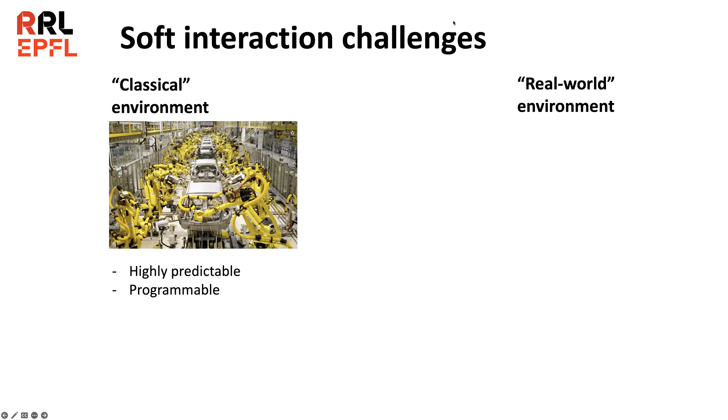To us, robots developed in classical environments are where the industrial revolution started, really. This has been the core essence of where robotics have come about in terms of their main challenges. How do we make our robots do better things than humans in a more safe, highly predictable environment? In that place, it was important that robots overperform humans in a mechanical way, so augmented performance compared to humans in terms of force, speed, and precision was very important.

Now fast forward to 2023, while augmented mechanical performance is still very important, we are living in a real world environment where things are not very predictable. Therefore it's not easy to program, it's not easy to control. In that case, how do you determine which robots are better suited? Which robots are actually an improvement from previous versions? Maybe we need a different type of metric than just augmented performance.

Maybe it can still be augmented performance, but in terms of interactivity. So having robots that are more adaptable to this random environment, robots that are more reconfigurable to unknown circumstances and unknown topology of the environment, and still being safe during operation, may be a new metric that we can employ on top of augmented performance.

This has been the question for a long time in my work. First of all, it's very difficult to create a benchmark to measure this. How do you know if your robot is more adaptable than another robot, especially when your body configuration is completely different? How do you know if your robot is safer than another option? How do you measure? How do you compare?

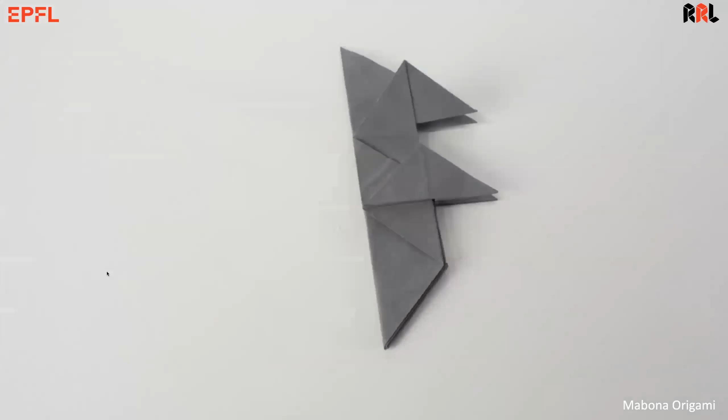We get this inspiration by having this quasi 2D substrate, manufacturing in quasi 2D, and using that to create multiples of different configurations, just like folding a piece of paper. If you fold it long enough and precisely enough, you can create something like this, a rhinoceros. If you are not as dexterous, you can at least fold up a paper airplane or a paper boat. This is multiples of pictures put together to create an animation of a rhinoceros popping up.

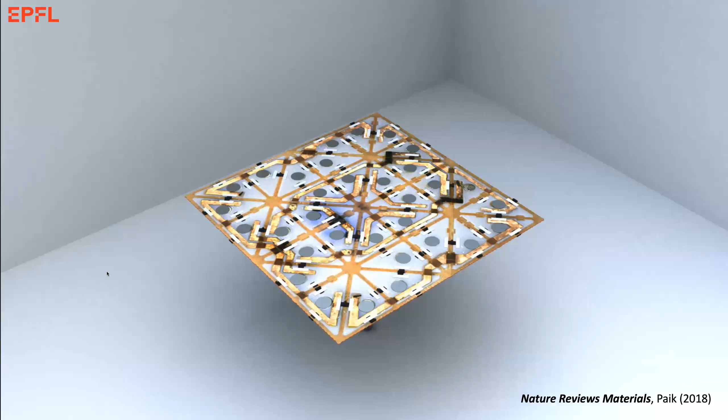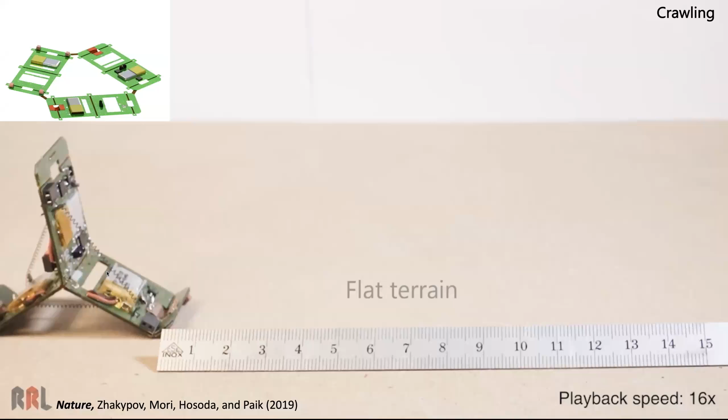One of our simplest robots is called Tribot. It's manufactured exactly through this method. What you see in the top left corner is a Tribot, a 3-surface structure that self-folds and advances forward by pushing itself, employing an inchworm locomotion motion. On flat terrain that's very smooth, you can push forward and retract the back leg, and by moving both feet, you can create different levels of friction to advance forward.

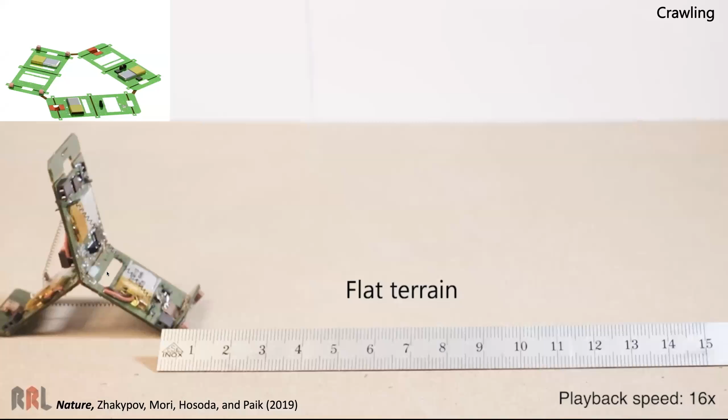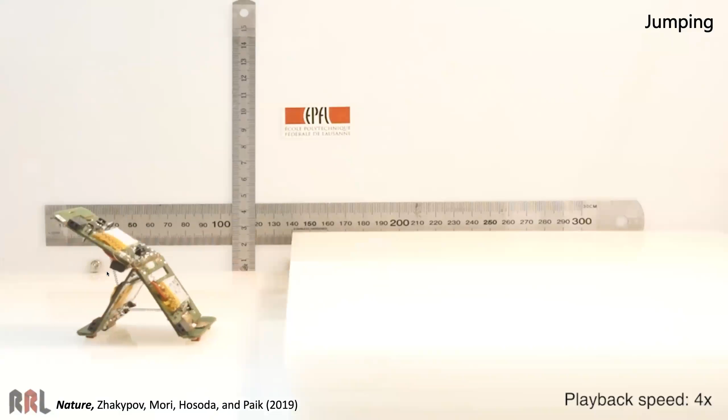But what if we give it a different environment? What if it has a higher slope and it's no longer flat and smooth? For example, rough terrain - it needs to adapt its foot shape and change its actuation sequence. With a slope of 10 degrees, it will still roll over. What if you give it a bigger challenge, like introducing an obstacle? It can actually hop over it. Very simple mechanism, very simple robot, but by changing its actuation sequence and the configuration of its foot motion, it's able to adapt to the environment.

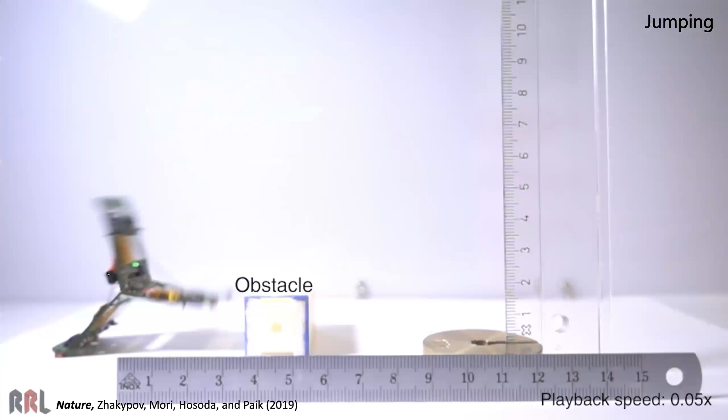That's what's quite unique about reconfigurable robots. By changing the configuration of its morphology, the foot shape, or anything else on the body, it's able to achieve different tasks, whether known from the beginning of the conception or not.

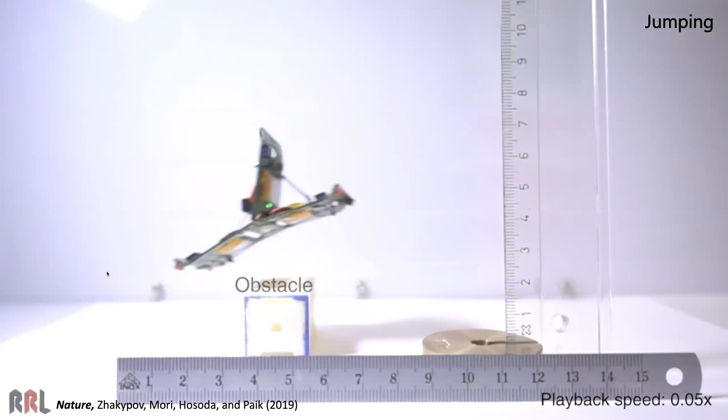What makes it more exciting is that these robots can remain simple, but you can customize all the agents, and the strength comes in numbers. The more of these robots you have, we can start playing with the morphing of a swarm of these robots. When you talk about swarm robotics, which is not exactly what my lab is focused on, we are still able to create hardware platforms that can be used to study bigger swarm groups.

Obviously, there's a group at Harvard that's done the kilobots. We have not made thousands of these robots, but this is a first-time case study of a platform that can create multiples of locomotive motions. We're creating 3 distinctive locomotions plus an additional 2, so a total of 5 different locomotive modes, depending on its environment and depending on the communication.

The current version of Tribot has transceivers and receivers to gather information from its neighboring agents. It's able to communicate, collect data, and manipulate objects alone as well as with its neighbors, hopefully achieving its goal regardless of the environment or how tough it may be from the beginning of its journey. The take-home message here is that even if your robot is small, if you have a large number of them, you can achieve a larger task field.

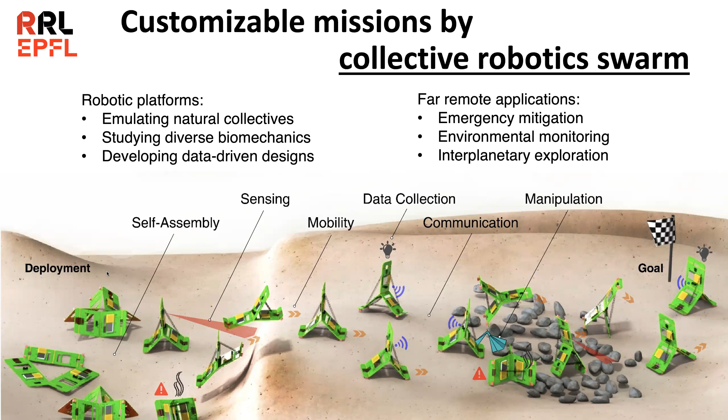How do we manufacture them to be so many? We rely on this quasi 2D manufacturing process. Normally, quasi 2D manufacturing processes don't really exist for robots, but they do exist for creating IC chips, which are a critical component in any robotic system or machinery. We rely not necessarily just on photolithography to create the PCB board, but on creating the overall shape and outline of the robot that allows us to embed different existing components and then run the final assembly.

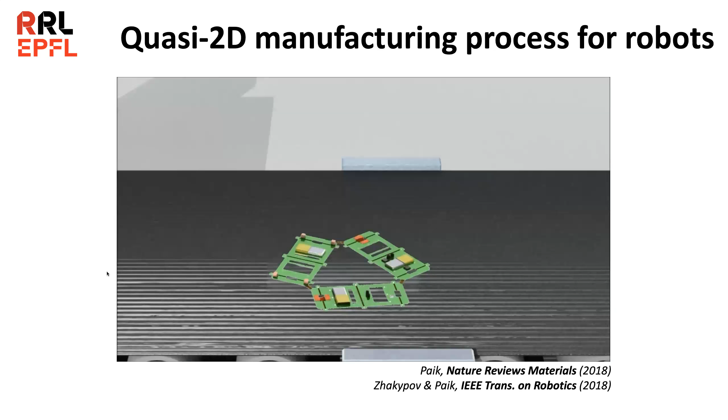But the magic is right here, the self-folding part. If you're able to create a self-folded robot into a three-dimensional robot, the magic, or the difference, in changing the dimensions allows you to create three-dimensional movement. That means three-dimensional tasks.

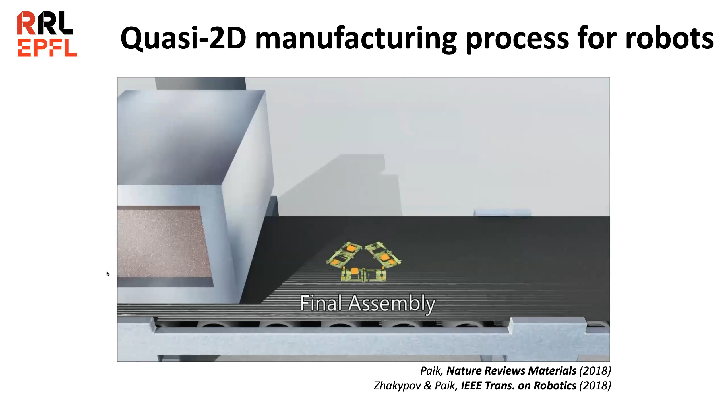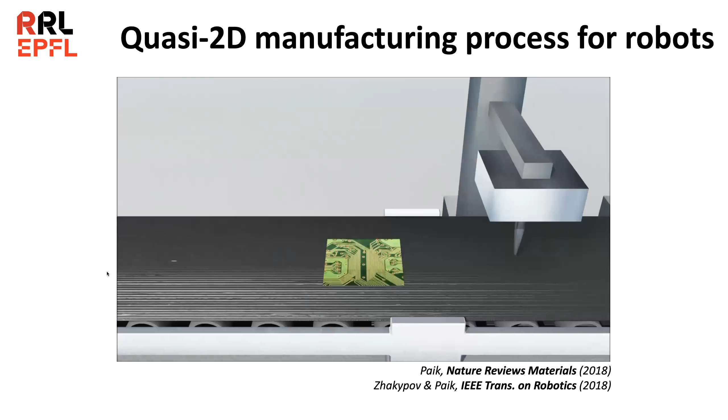Changing this dimensionality allows us to not only create such a large design space, but also such a large workspace that the robots can achieve. And that really allows me to talk about sustainability.

Sustainability is such a huge word for anyone doing anything in recent years, not just because we're talking about how to preserve the environment, but it invites us to think about how we're approaching our level of studies in a more sustainable manner.

To me, having a sustainable platform for robotic manufacturing means we produce what's necessary for the application. If the application necessitates additional sensors or different types of motors, this quasi 2D manufacturing platform allows us to have that. How?

Basically, we're following this conveyor belt of materials, cutting processes, pressing, pick and place of different components, and assembly at the final end. By having this quasi two-dimensional manufacturing platform, it allows us to insert different versions or different processes in between, as long as it's within this work field, within this dimension.

On the application side, the application will demand you to have different types of components. That can be used as a customized file to update the system design. The system design has different parameters. It's not quite completely new.

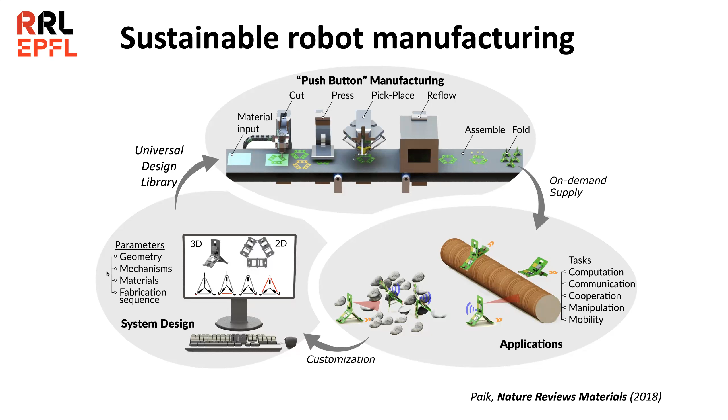Don't just take my word for it—based on this manufacturing process and methodology, we were able to update and iterate our design multiple times, beyond what I was willing to sign up for. And that's when we were working with...

Mercedes-Benz industrial designers who were requesting us to update our flap design for the concept car to be presented in 2020. That meant us having to reiterate the flap design about 50 times over the course of a couple of months. That's quite unheard of in terms of creating any hardware, let alone robotic hardware.

So what we actually ended up producing was a quasi 2D platform that creates three-dimensional motion. I'll go more into detail about what this kinematic chain is, using the bottom plate as an example here.

I don't know—can you see, let me see if I can get my cursor. Can you see it? We can see it, can you see my cursor moving? Yeah.

Perfect. So the top surface actually moves in 3 degrees of freedom, meaning it has a translational Z-direction translation, and 2 rotational degrees of freedom.

What we had to update was these flap angles and flap length, so that we could optimize this flap range of motion for the size of the motors. We also had to take into consideration whether we could optimize the height that it gets popped out of the foil.

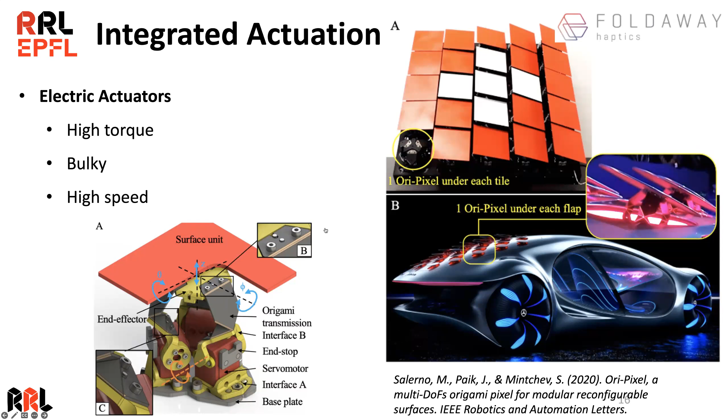So we installed 36 of these modules on the back of the Mercedes, and this is how it looked at the end of our 6 months of effort.

Hello? Hello? Yes, okay, I can hear you still. Perfect. Right. Yeah, so can you hear me, Jimmy? Yeah, can you hear me?

Okay, yeah. So what you see here is popped up foils that are moving at 3 degrees of freedom. And as you can see, they're completely embedded behind the airfoil zone of the car.

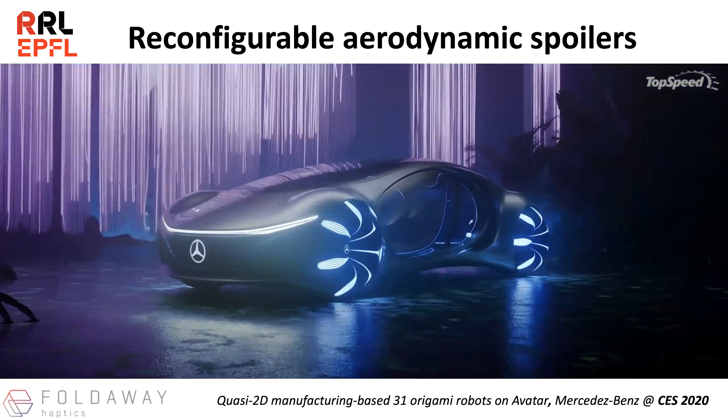That was the result of basically 60 iterations of the foil length, the panel range of motion, as well as the overall height change during this period. There were no new sensors added, but the transmission length change actually cost us a lot of iterations in the manufacturing process as well.

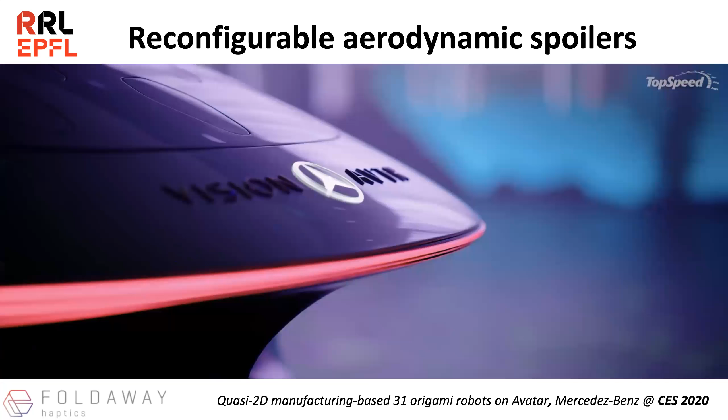The next thing I want to talk about: yes, we are inspired by a lot of folding joints of origamis, but what if we can expand this design space, meaning any type of robot is just as big as its initial materials?

What if you can add materials or subtract materials, like in Lego blocks? The more Lego blocks you have, the more freedom of creativity you would have, and the larger the workspace and design space would be. This type of idea was carried on for our European Space Agency project.

So the idea was having a single Lego block, a homogeneous shape, to be the base block, and to add or subtract the number of blocks. Depending on how many blocks you have, and because they will be independently controllable, we could create an explorative robot that can explore underneath the ground, over the ground, and above the ground.

And because if it's space, we would have space astronauts working in a space station. We thought the same platform could be used for fixing solar panels, or for exploring and testing different specimens, serving as a third arm, or as a platform to interact through a tangible medium with people on the ground or anyone else requiring communication. For me this was quite exciting, because we're not taking away the essence of multiple folding joints, but adding and subtracting them as we see fit for different applications.

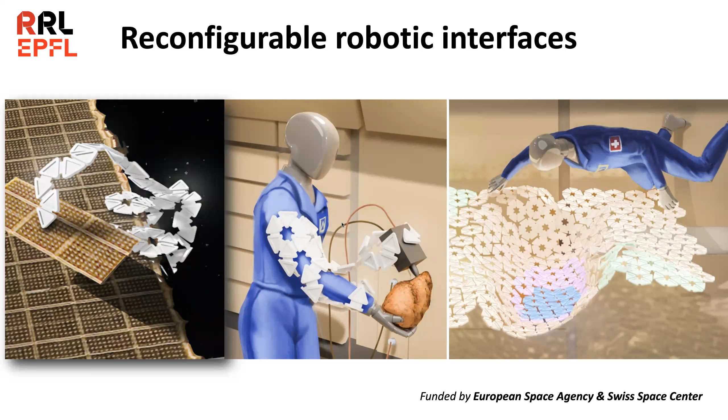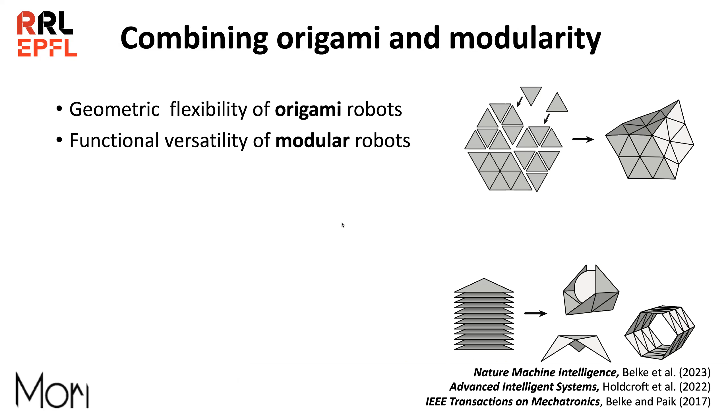So combining origami and modularity really played a huge role in the next project. We call this MORI, modular origami. Having the geometric flexibility of origami robots and the functional versatility of modular robots allows us to really expand this design space, as well as the overall volume and configuration of these robots. So what can you possibly achieve having both this flexibility and versatility?

Well, the immediate thing you can always go for is quadruped walking. There's a lot of robotics that works on quadrupeds. But if we have enough modules to achieve this quadruped walking, the next thing we often go for is manipulation. How about two-fingered manipulation, or a two-legged soccer player?

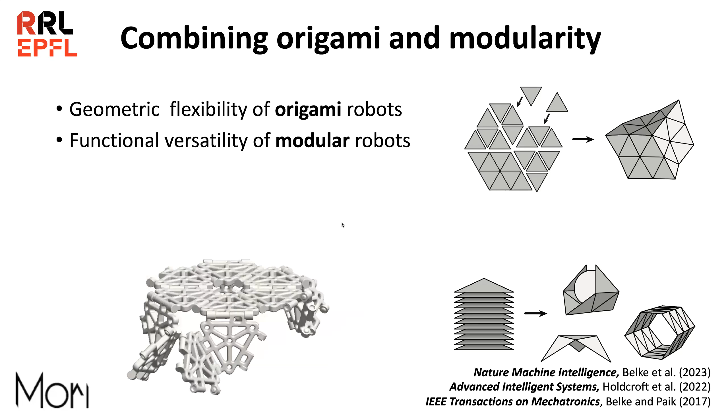But also creating a different box shape by reconfiguring the location of attachments. So having a fluidic or dynamic flow of placing a different object from one end to the other, translating it, manipulating it, reorienting it, really depends on how we are controlling these individual modules and their relative position to neighboring modules.

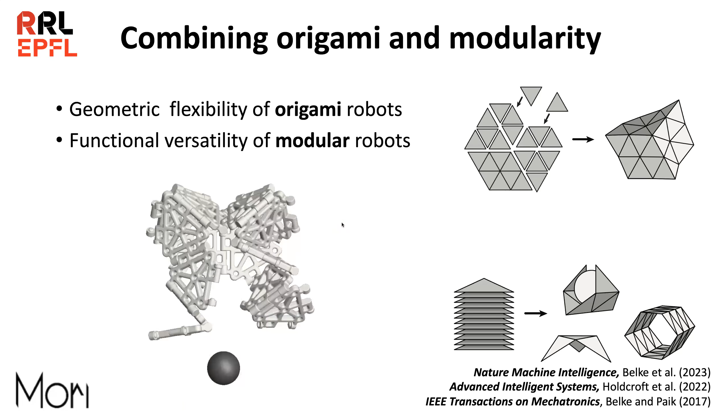And this is how we came up with MORI, or this is how we first imagined MORI to be. This was one of our first generation MORI. So this is MORI 1, where a single module comes with 3 degrees of freedom, 3 rotary degrees of freedom on each edge.

But if you add another module that's active, you're able to create a bigger workspace again. So because of this geometric relationship that couples one module to another, this is the relative constraint, or the relative advantage, for creating a specific workspace.

But what if we can actually control this again? Meaning, how about taking advantage of not just the geometric versatility and flexibility here, but enabling it to be even larger? What do I mean by that?

Well, what I mean is when you're doing meshing - calculative meshing of any structure to understand structural mechanics - you break it down to the smallest unit as well, again in polygons. In that case, we create a mesh of the solid or shell model and try to understand the relationship between the modules to each other.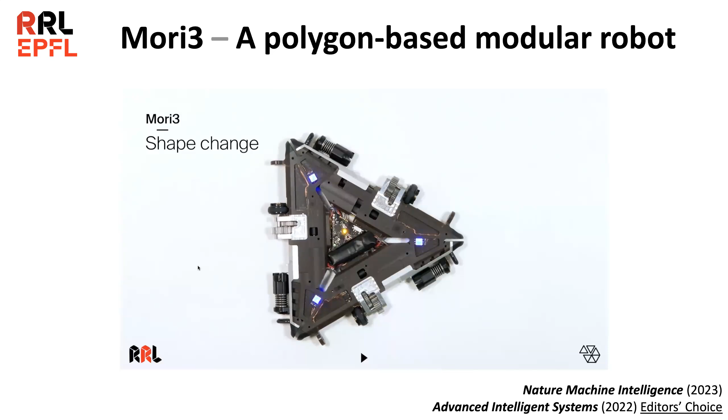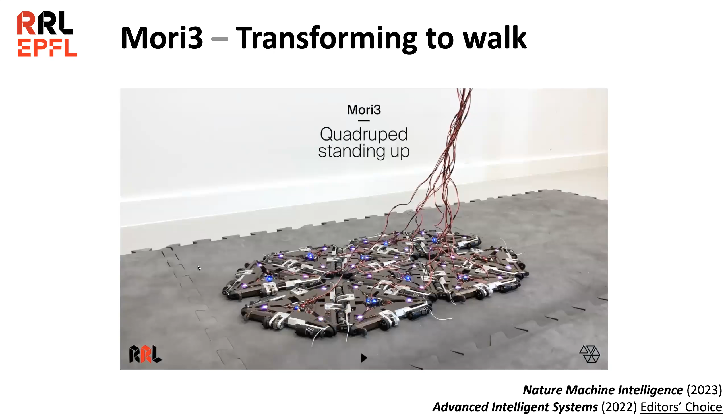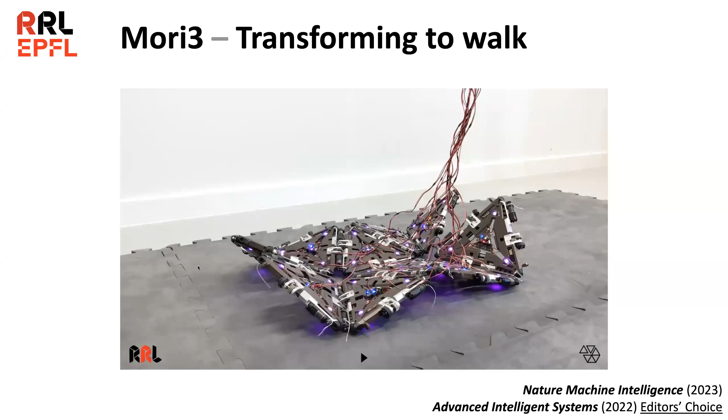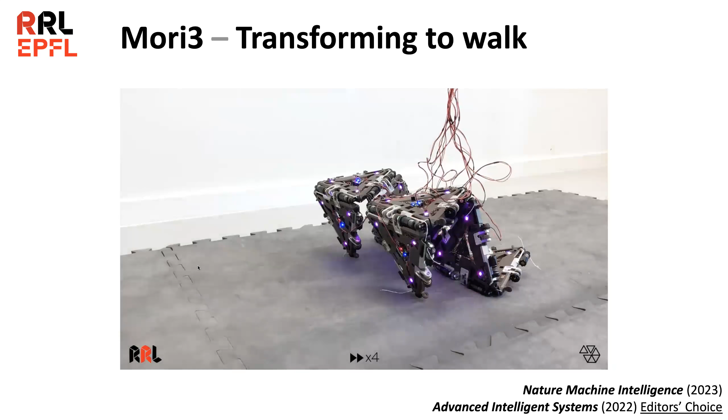This small change completely changes how we control when these modules are fully assembled. For the quadruped, imagine having to stand up from the singularity point, which is completely at the bottom, and advance forward. Currently we only have one backbone here, with modules assembled next to each other, sharing one length between them.

If you were to use an isosceles or equilateral triangle, where all the lengths are the same, you would require at least 30% more modules to achieve that, because you wouldn't be able to have that changing length in the backbone as well as this relative length.

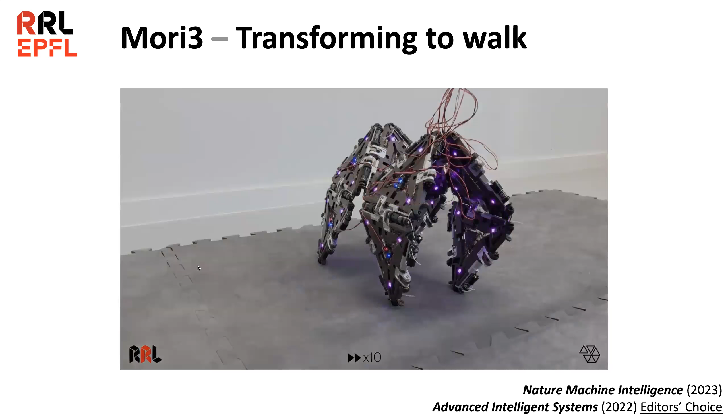Same idea with a robotic arm here. We have five modules, basically one two-legged side of the quadruped, creating a hockey puck passing motion. What's important when tossing a hockey puck is that your arm remains completely parallel to the puck and perpendicular to the surface, then parallel to the movement of the puck. That ensures a smooth passing motion.

It's a bit difficult to see from this angle, but we're able to achieve this motion again because we're extending a couple of the modules' edge length. That allows us to maintain the same number of degrees of freedom in the edges, but create a larger range of motion in the workspace for effective use.

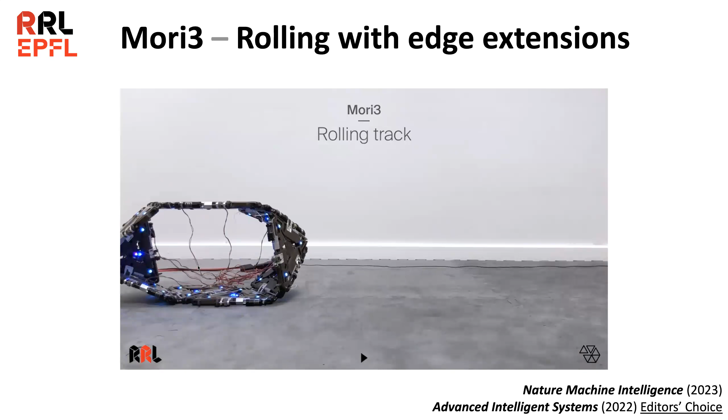The best way to go from point A to point B, on a smooth or rough surface, is just rolling over there with a wheel. It's difficult to achieve a wheel rolling motion when you don't have enough modules. If you had about 10 times more modules, it would become a smooth enough rotational radius to roll over. But in this case, we're actually pulling one module over the other to create this rolling motion, using edge extension to showcase it.

Another exciting part is that because we can change the edge extension rate and direction, we can actually control which direction we're rolling it over. So we're trying to go left, right, and straight by employing different edge lengths.

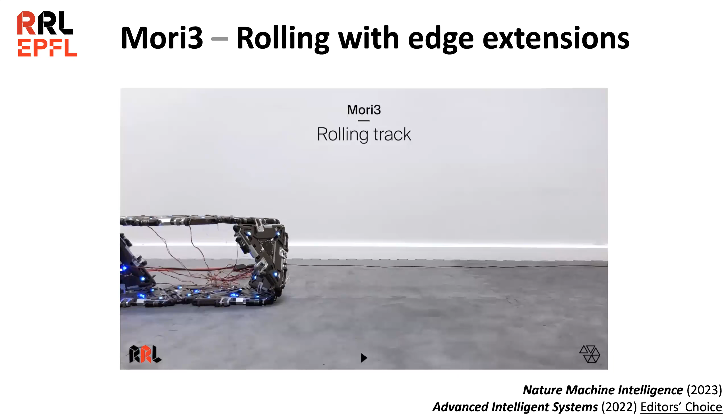The modules are also tethered here with wires, but technically we're able to use onboard batteries to achieve this. The latest work we're doing now involves a QP controller to optimize different ranges of motion, and we're demonstrating it without cables attached to batteries in the current experiments.

I want to come back to the idea that having multiple degrees of freedom and folding joints allows us a larger design space, and having a larger design space allows for stronger and more intuitive interaction, because we have more degrees of freedom to work with. That's what I want to get back to here.

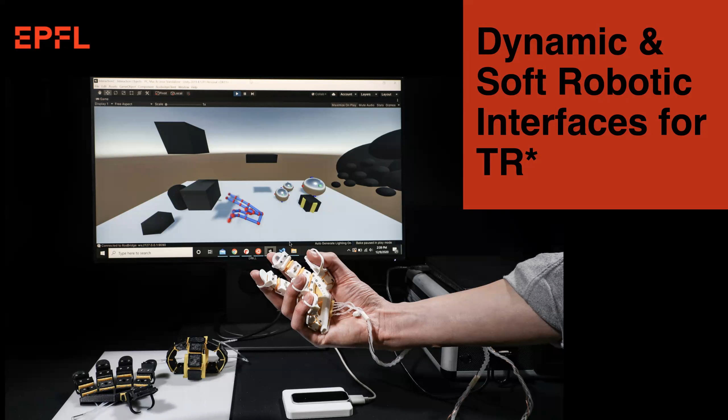Dynamic and soft robotic interfaces, or TR, tangible reality, is an exciting topic for our lab, because this is an environment where we don't have much other choice. Currently, how we interact with the virtual world is completely digital, visual, or auditory. As you watch and hear me talk now, you can't really feel like you're present in the space, because you're not completely immersed. Even if I showed up as a holographic image, you probably still wouldn't feel immersed. The reason is we feel a lot through the sense of touch.

So how do we feel what we see? When you see something, you want to feel it to get a sense out of it, and your skin works really hard, with many mechanoreceptors giving you the feeling of temperature, pain, stretch, and pressure. If you want a robot or interface to transfer this sense of sensation digitally, without me touching reality, but through a digital or mechanical platform that recreates this information, what do we need to send digitally over?

Well, first of all, you have to know what the capacity of the platform is going to be. Is the capacity of the platform going to be real enough for it to recreate what I'm sending over? Well, let's forget about the capacity of the platform, but who's going to first feel it?

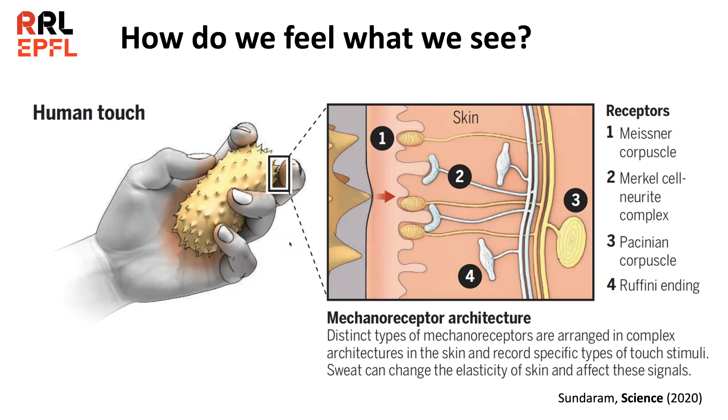So it's not that straightforward. How do you make this? How do we transfer this information? It is about transferring and gathering this information.

So the robotic touch current state of the art is really very much vision-based. Through vision, we can do a lot. By looking at the optical sensing, you can see from the changing optic fiber radius curvature how transparent the materials are, how hot or what the temperature of materials is, and how soft it is as well nowadays. But at the end, they are quite nonlinear, and we have to go through a lot of learning to make sense out of it.

And if you want to talk about slipperiness, stickiness, softness, for example, if you have a soft tissue on top of a hard surface versus the softness underneath, this feeling is completely different for us. But when you put this under a load cell, they measure the change in displacement compared to how much force you put in. It's going to be the same reading. So it's not straightforward.

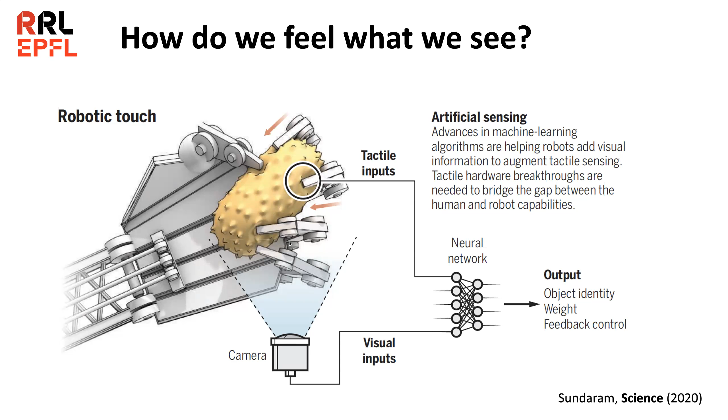So that's the first challenge. I don't have answers just yet, other than extremely better sensors. The second challenge is, how do you recreate that feeling?

So let's go back to how we feel it. Well, we feel it through two different ways combined. One is cutaneous feedback, meaning skin deep—my skin with mechanoreceptors feels a lot. And kinesthetic feedback, which means I actually want to knock on it, squeeze it, hang it, toss it around to get the feel out of it. So humans use both of these feedbacks to learn what the environment is.

So this is where my research goes. How do we create platforms hoping that sensors can give us enough information, and robotic manipulators can give us a lot more information in the future, to have a platform that can recreate these feedbacks?

And currently, they are divided into multiple scales. So skin level, cutaneous feedback, as well as kinesthetic feedback. Because skin level cutaneous feedback is such a very thin surface, the size and compliance of devices have to match the compliance of the skin.

Kinesthetic feedback is really about the movement of hands and movement of your body, so your device has to match the compliance of this movement. That's why scalability is not just about sizes, but also about matching compliance. So one of the things we're trying to use our platform, MIROS, for is to match the compliance of our larger scale interaction.

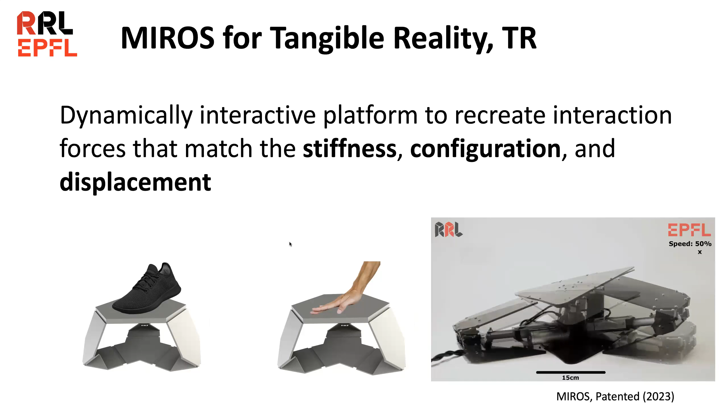With that platform, what we're able to achieve is this type of simulation. It's a fun game, but it's more than that, because what you're seeing here is an interactive platform where the user is feeling what they're seeing. It's the first of its kind to be physically interactive with the virtual environment on it. You can think of it like a glorified kart track simulator, but it's more than that.

Imagine you don't want to be standing two feet on the board, but doing skiing instead. A skiing simulator requires two legs having different motions. If you're good, that's quite straightforward, but if you're not, you end up having your two legs moving in different directions. With two of these platforms, you'll be able to achieve that separately. So figuring out this network of stiffness changes in the platform is currently what our research group is focusing on.

I was telling you about the scalability. The smaller, more delicate level of cutaneous feedback really comes from the skin level. Let me talk to you a little bit about the interactive soft pneumatic actuator skin. This is skin you can wear directly on your skin, which does not interfere with your actual motions, your kinesthetic feedback, or your interaction with objects you're manipulating.

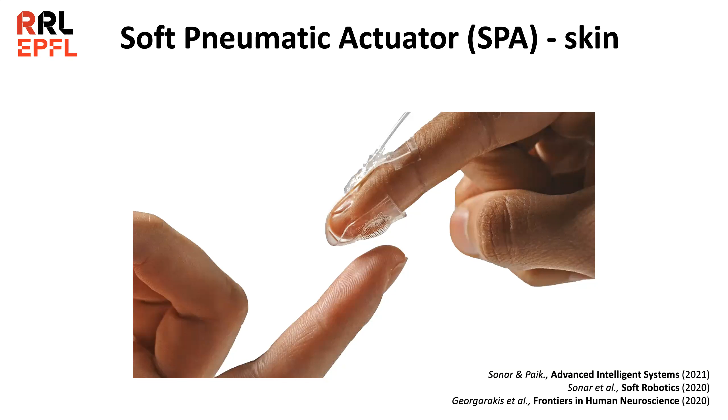These sensors are also embedded with their own sensing elements, so the skin has its own sensors that allow us to feedback-loop control what it's actuating, as well as the contact forces and their locations. These sensors were also developed at EPFL by Professor Lacour's group, and they are completely integratable into the skin through liquid metal and very thin gold film.

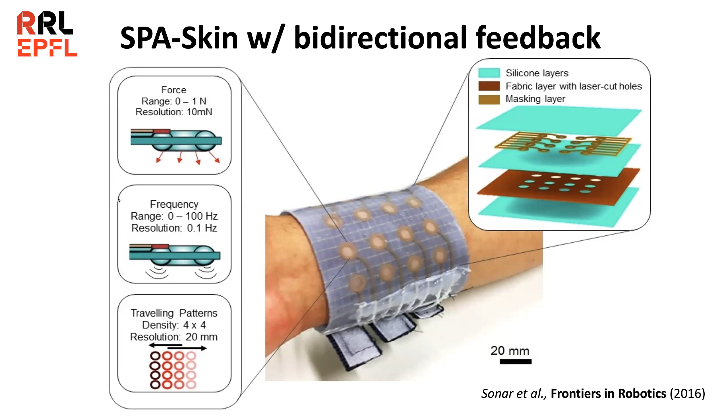If you make enough of them side by side, you can have a grid patchwork where you can create not only Morse code, but distinctly show location, shape, pattern, beats, and frequencies that can give much more intuitive sensation and information, directly without relying on your vision or auditory means.

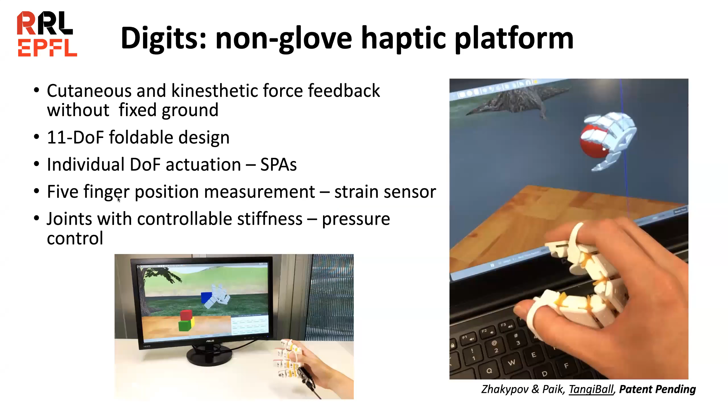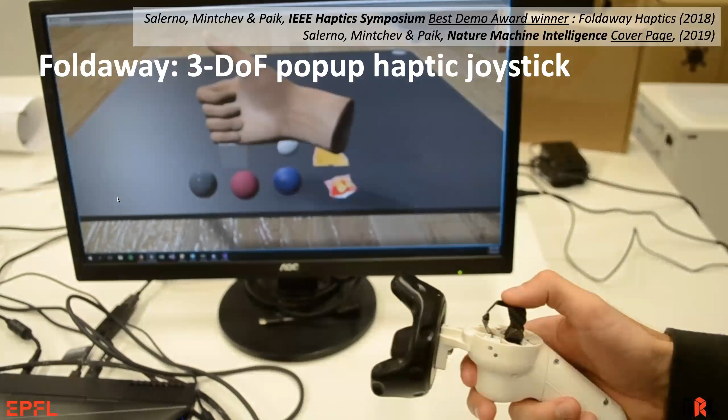So this is our foldaway — it was a little... this was our first version of a 3DOF haptic joystick. This is a much smaller version of the MIROS you saw before, which we developed for a skiing or snowboarding simulator. This gives a single point of feedback to recreate a profile and stiffness change as the profile changes, when you have embedded different material properties of the objects being picked up.

If you were to pick up the cheese at the back — because we're in Switzerland, it's good to have a representative food group there — you would actually feel the change in curvature and the edges of the cheese block. And if you were to navigate through a screen or an image, you no longer have to rely on the video image alone, but can also use a cursor that serves as a feedback device, giving you a different material density represented in the visual image.

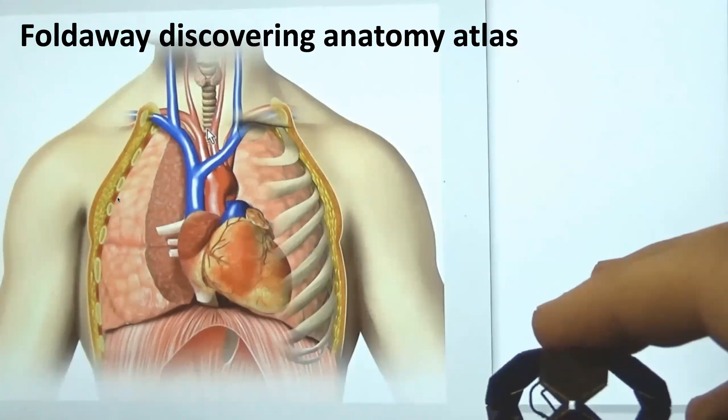The same platform can not only give you feedback underneath your fingertips, but can be used as a wearable, as an extensive extension of one's body. This is a work we did with Silvestro Micera's group at EPFL, who's studying the effectiveness in...

The take-home message in these slides is that because these origami platforms are so light and so versatile in terms of their range of motion, we can use them as an interactive device for manipulation as well, worn on your body or as a desktop. This one shows the different versions and different scales.

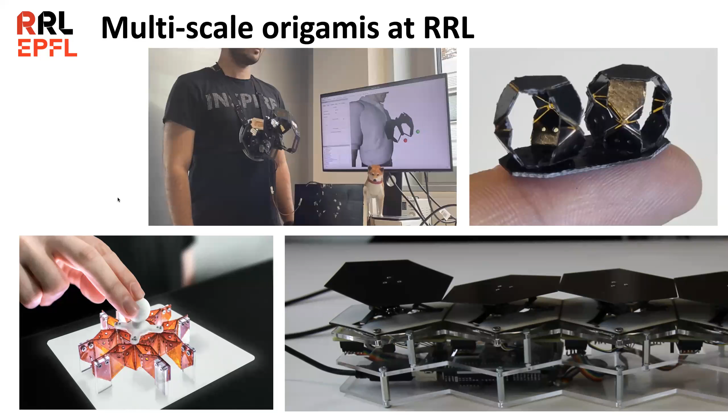On the left top, you see Mete wearing it with two modules in series, controlled by his breathing to match the image on the screen. The smaller, fingertip version is on the right top. On the right bottom, you see them connected in parallel rather than in series, as shown on the left top.

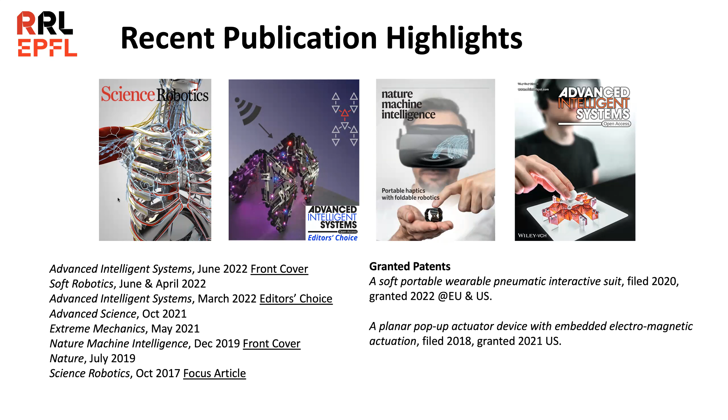Some of these works are featured in magazines, but I encourage you to read one of our initial works in Nature Machine Intelligence that talks about how we use this as a joystick with haptic feedback. Hopefully I've convinced you today that these origami-inspired robots, with modularity and reconfigurable modes, can have multiple applications: communication through tactile means, wearable applications like having a third arm or physical cutaneous and kinesthetic feedback, and being collaborative as a multi-agent swarm robot platform.

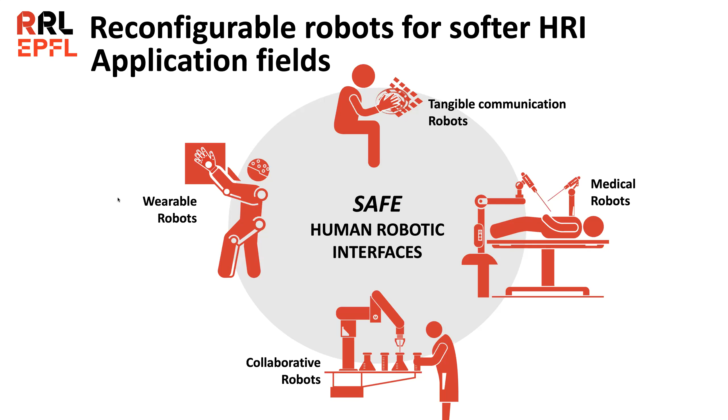I didn't really talk about the medical robots, but I'll be happy to answer any questions on that during the Q&A. I must mention our funding bodies, and if you have any more questions, I'll be happy to receive them now. Thank you.